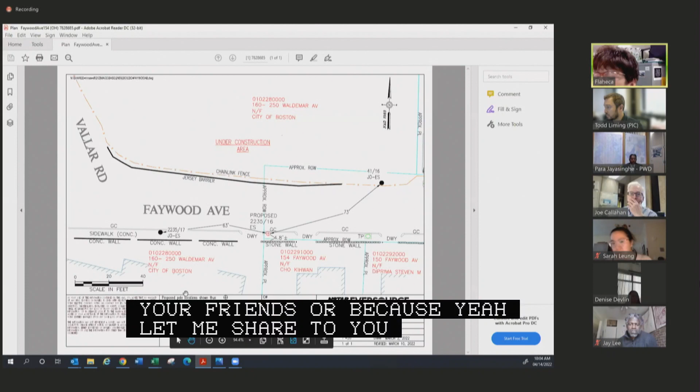Yeah, let me share. So there's the location there of the proposed pole. And the engineer that designed the job said that they needed that distance to avoid slack from across the street from the existing pole. That's why they needed to put that in.

Thank you. Any comments by fellow commission members to the petitioner? Hearing none, Todd, did you all get a chance to look at this proposal? Are there any comments by PIC staff? Yes, we've looked at it, we're all set. Thank you, Todd.

Are there any comments by members of today's audience? I see none, though I will take this opportunity to remind members of the audience if they wish to add testimony, they should please use the raise hand feature at the bottom of their screen.

Thank you, Mr. Liming. Hearing no further comments, I'd like to hear a motion regarding utility pole hearing number 1. I'll make a motion to approve a petition by Eversource Energy for a pole installation within Faywood Ave as read into the record by the chair.

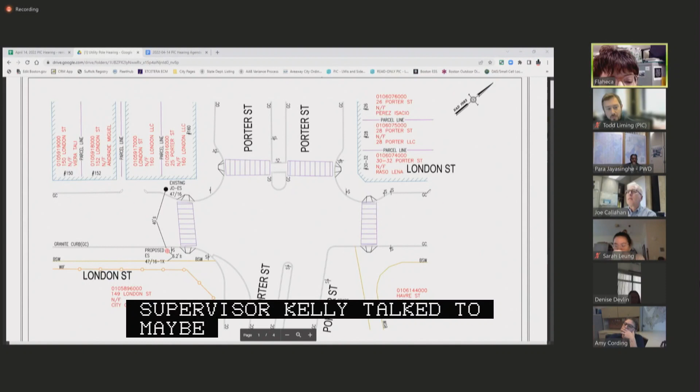So the sign on your plan that is right behind the pole is a stop sign. Yeah, I think my supervisor Kelly talked to maybe, I don't know who, but she did tell me that the plan is that when we install the pole, we'll move the stop sign to in front of the pole.

Okay, well, so I think that if you're moving the stop sign to in front of the pole, where we put the stop sign is somewhat important. So I think it's more that where the pole slides, the stop sign can still be where we'd like a car to stop, right? They can maybe switch positions, but I think we can't just keep sliding a stop sign down the road. That's probably what she meant, Amy.

I might have said it wrong. Also, why aren't we putting this in the gravel at the back of the sidewalk with the large highway signs? Why does this have to be in the sidewalk at an intersection? I don't have the answer for that. I can bring back your question and let you know.

Yeah, I mean, it shows it's owned by the City of Boston. It clearly has a bunch of highway signage, and there's a bunch of dead space in front of that fence line right there. I think that'd be a better spot for the pole. I can find out that answer.

Any additional comments by PIC staff? Hearing none, I'm of the opinion that you should field review this with or without the participation of PIC staff and address Ms. Cording's comments.

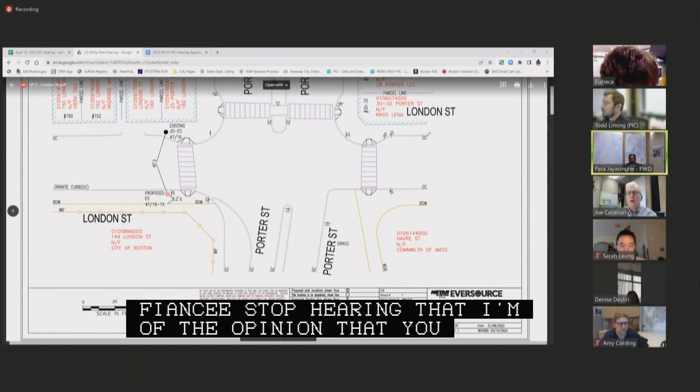Also, something that has been asked of all petitioners is to submit a recent photograph of this location. Oh, you have done that, my bad, sorry. Okay, so there you go. So I think Ms. Cording's comments are spot on as always, so your plans need to be reflected accordingly.

Understood. Because putting poles within the concrete path of travel is highly undesirable. We are trying to keep the sidewalk clear so that when I'm in a wheelchair, I can actually get to that crosswalk. Okay, so please amend your plans, resubmit them to the city's review, and that would require us to continue this hearing. Todd, is that correct?

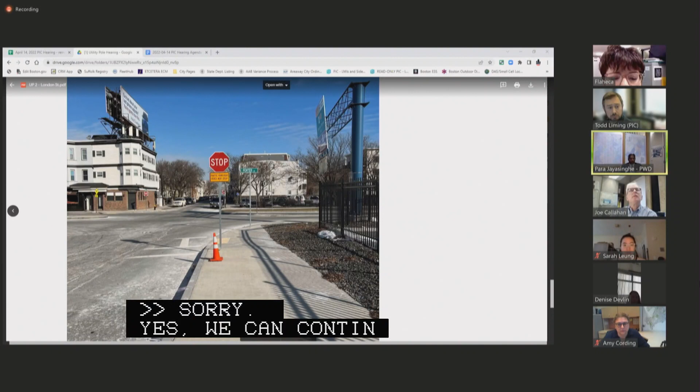Sorry, Mr. Liming, sorry, yes, we can continue this. So we'll continue it for 2 weeks, assuming that you can get your ducks in a row and submit an appropriate set of plans. Is that okay with you? Sure, understood. Wonderful. I'd like to hear a motion to continue the second utility pole hearing for 2 weeks. That should take us through April 28th.

I'll make a motion to continue utility pole hearing number 2 for 2 weeks until April 28th. April 28th, my bad. Second. All in favor? Aye. Aye. Anyone opposed or abstain? Hearing none, motion passes. Thank you.

Moving on to the public hearings continued portion of our agenda. Public hearing continued, item number 1, on a joint petition by the City of Boston's Mayor's Office of Housing and the Boston Redevelopment Authority, doing business as BPDA, for the widening, relocation, and extension of the existing right-of-way lines of Harold Street, a public way in Roxbury, from Holworthy Street to Hollander Street.

This was brought under new business on March 3rd of this year. First public hearing was March 17th, continued to March 31st, as shown on a set of plans entitled City of Boston, Public Works Department, Engineering Division, Widening and Relocation and Extension Plan, Harold Street, Public Way, Roxbury, 5 sheets dated March 31st, 2022. Good morning.

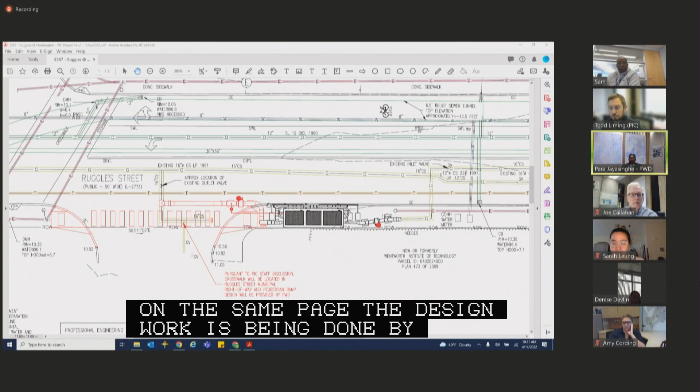Thank you, Todd. Just so that we are all on the same page, the design work is being done by the City of Boston. Set plans will be given to National Grid for their execution as part of this project. And the current PIC plans are adequate in its reflection of what is to be done. And the work will be inspected by respective parties to ensure the compliance of the ramps being built to the city standards. Something like that? Precisely. Thank you, yes sir. Correct. Any further comments by?

Apologies, commission members. I thought that we were doing the station first and then the sidewalk, so apologies for that misstep on my part. Peter, I'm sorry, Todd, did you hear what Mr. Nagel said? Yeah, we're all set. We are all set, good stuff, don't need to rework the issue.

All right, so at this point, I'd like to hear a motion regarding public hearing continued item number 4. I'll make a motion to approve a petition by National Grid for the making of specific repairs in Ruggles Street as read into the record by the chair, contingent upon the final design from Public Works on the ramp crossings.

Second. All in favor? Aye. Aye. Anyone opposed or abstain? Hearing none, motion passes.

Public hearing continued, item number 5. On a petition by National Grid for a grant of location to install a gas regulator station and associated infrastructure within Ruggles Street, a public way, Roxbury, located southeast of Huntington Avenue.

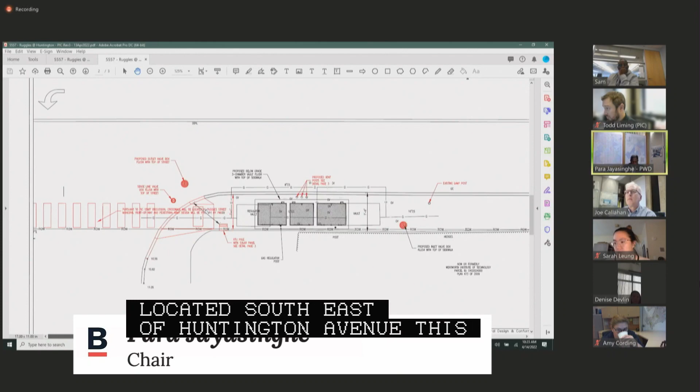This was brought under new business on March 17th of this year. First public hearing was on March 31st. As shown on a set of plans entitled City of Boston Public Works Department Engineering Division Grant of Location Plans, Ruggles Street at Huntington Avenue, Gas Regulator Station, Boston, 3 sheets dated April 4th, 2022.

Good morning, Commission members. Peter Nagel from National Grid, joined by Sam Uifo, our regulator station engineer, as well as Steve Damiano from Power Engineering, who is National Grid's permitting consultant on this project. What you have before you today, Commission members, is the previously referenced station that we worked with PIC Commission staff and pertinent city officials to reach a design.

The existing layout of the station would be replaced in kind in the sidewalk with resultant 12 and 16-inch coated steel piping, as well as a replacement of the 2-vault system with a 3-vault system with the aforementioned vent poles on the sidewalk adjacent to Ruggles, as well as the pole mount SCADA box, which you can see is closer to the proposed crosswalk with ADA compliant ramps.

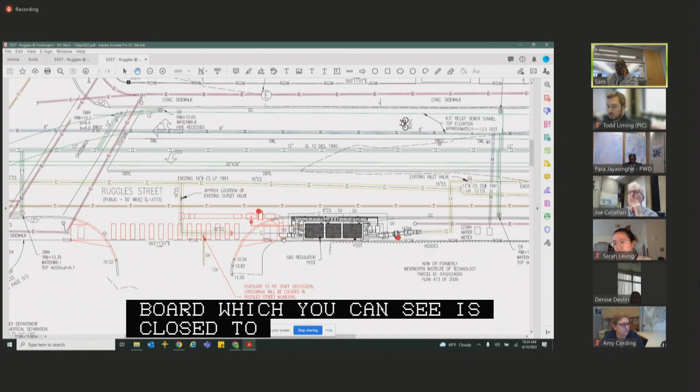Thank you, Peter. Going to ask a totally stupid question, obviously, everyone. I'm going to assume that the covers of your 3 vaults, the actual cover, is absolutely ADA compliant to today's standards.

Yes, as some of the commission members are aware, we've had a couple of meetings with the ADA, with Persons with Disabilities Commission, and instituted a pilot program that we have continued with those compliant and accepted Bilco doors, if you will.

Thank you, Peter. Appreciate that. And as always, work that is being approved by the Commission on matters of this nature, if and when the standards should change and evolve, you will do the necessary adjustments so that your assets are in compliance with our right-of-way needs. I'm going to assume that understanding is still current with you. Is that correct? Yes, it is. Thank you, sir.

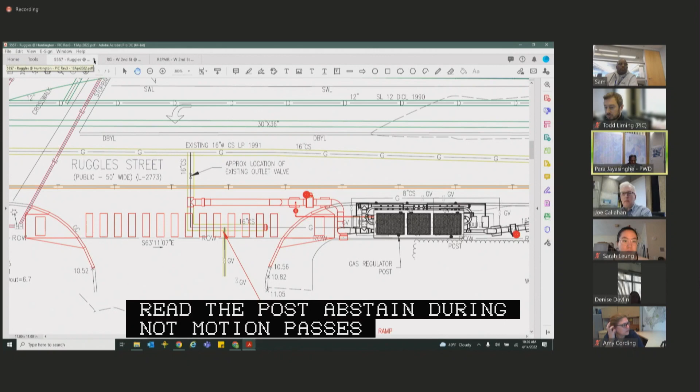Public hearing continued, item number 6, on a petition by National Grid for the making of specific repairs within the following public ways in South Boston, consisting of curb realignment, sidewalk reconstruction, as well as new and relocated pedestrian ramps and street lighting infrastructure. West 2nd Street, generally at West 3rd Street. West 3rd Street, generally at West 2nd Street. This was brought on as new business on March 17th of this year. First public hearing was on March 31st. As shown on a set of plans entitled City of Boston Public Works Department Engineering Division Specific Repairs Plan, West 2nd at West 3rd Street, Boston, 3 sheets dated April 6th of 2022.

Peter? Good morning, Commission members. Peter Nagel from National Grid, joined by Sam Uifo, our regulator station engineer, as well as Steve Damiano from Power Engineering, who is National Grid's permit consultant on this project.

National Grid has long heard the Commission's desire to get its infrastructure out of the public rights of way, ideally on adjacent properties. That was not possible here. So what the Commission has before you is a plan to do some robust streetscape and curb work to accommodate a new regulator station in that vicinity, which is presently in the existing roadway layout.

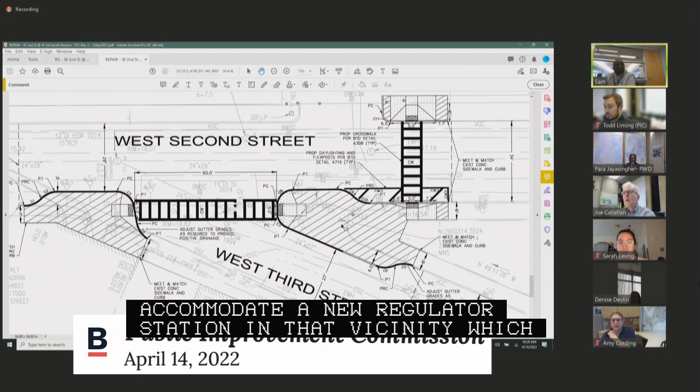So working from left to right on the screen with the plan in front of you, the cross-hatched areas are the new curb lines, which have been approved by pertinent city officials working diligently with PIC staff. That new deeper shaded line, the black line, represents about a 5 or 6 foot outcrop from the existing curb line on West 2nd Street as you approach West 3rd.

Moving to the right, you can see a new compliant ADA ramp, which will enter into a new crosswalk going across West 3rd Street. Similarly, on the right-hand side, you're coming into a new ADA compliant ramp. On that landing area, there is again a new curb layout, which again, in most areas is about 4 feet bumping out from the existing, which is shown again in the crosshatch. That area will be

the future proposed location of the regulator station as well. Above that crosshatch, you see again that curb bump in there on West 2nd, coming over to a compliant ramp which runs over to a new crosswalk crossing West 2nd, which will bring pedestrians across to another compliant ramp on that sidewalk on the other side of the street.

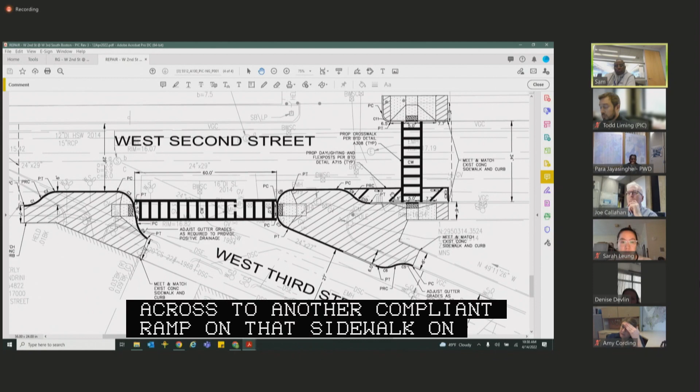Back to the West 3rd side, left of the existing crosswalk area, while the bump in is there above, on the dark crosshatch, will show where there'll be no parking areas to protect any pedestrians in that area, as well as to the right, again, a small no parking area where parking would start just beyond that on West 2nd.

Additionally, National Grid is proposing, with Public Works Department Street Lighting Division's support, 2 new light fixtures, one on West 2nd Street, which the commission members can see is indicated by the dancing arrow there, if you will, and then one on West 3rd Street as well.

Thank you, Peter. Any questions or comments by fellow commission staff? Yes, I think first the streetlights should be on the plan, the new ones. The streetlight is here. Okay, we're going to show it on the detailed design.

Can you hear? Sam, speak up. So we're going to show it on the detailed design. We're thinking we're going to do the regulator station first before the specific repairs plan. So on the repairs plan here, you have these streetlights as requested by the lighting department. And then we're going to make a connection from here to the electric manhole cover here for the city. Same thing here, the light pole is over here with connection to the electric manhole cover here. We've already agreed that with the city, the lighting department.

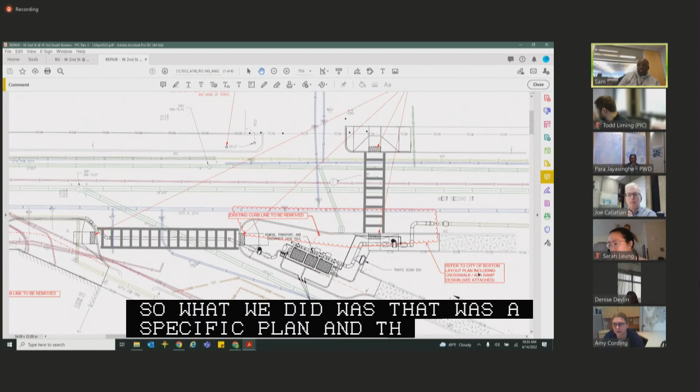So what we did was, when we got the drawings from the city at about 4:51 or so on Monday, I went to the specific repairs plan and put a cloud around it, and then added a note: refer to City of Boston's layout plan, including crosswalk/ADA ramp design, see attached.

So we referenced it in this drawing to let the city know there was a modification. And then we took the city's design that the city gave us and attached it to this PIC set to show that once we're done, National Grid will give the city exactly what is shown in this drawing here.

I think I get it. I think the issue I have with this design is that we're now creating a point where we won't be able to plow or sweep here, because we're putting this ramp behind a little bit of flex posts, right? So it's going to be a tricky spot. I think this isn't anything you're doing, like, we gave you something, but if we look at everybody's considerations here, I think that just stands to change.

I assure you it wouldn't be any different than the one that was on the previous plan, but I think it's really just whether or not putting flex posts at this location makes sense.

So one thing we can guarantee you, Amy, is that whatever final design or restoration plan the city has for this location, National Grid will provide the support.

And the light that used to be on this corner that you're taking away used to have the street name signs on it, like a hero square. It had a variety of things attached to it. If you move it and replace it with two different lights in two different locations, those signs need to find their way back to the corner. Sure.

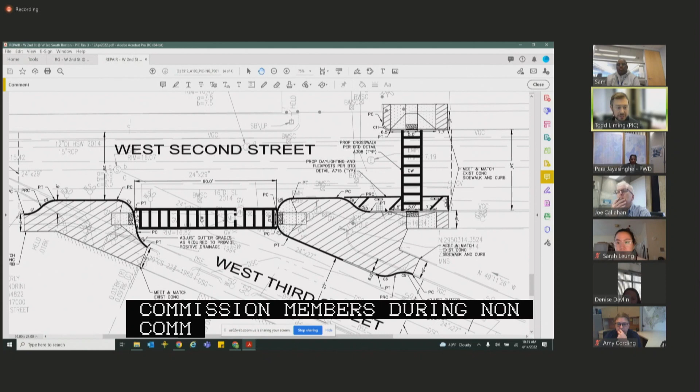No, we appreciate National Grid working with us to get to a design. So the final PIC plans will reflect exactly what everybody is looking for here, and I think we're pretty much there. Absolutely. Thank you, Mr. Liming.

Like to hear a motion regarding public hearing, continued item number 6. I'll make a motion to approve a petition by National Grid for the making of specific repairs within West 2nd Street and West 3rd Street, as read into the record by the chair, contingent upon the final design they received from Public Works. Second.

All in favor? Aye. Let's finish this one. Anyone opposed or abstained? Hearing none, motion passes.

Public hearing number 7, on a petition by National Grid for a grant of location to install a gas regulator station and associated infrastructure within the following public ways in South Boston: West 2nd Street, generally at West 3rd Street; West 3rd Street, generally at West 2nd Street. This was brought under new business on March 17th of this year. Public hearing, first one was on March 31st, as shown on a set of plans entitled City of Boston, Public Works Department, Engineering Division, grant of location plans, West 2nd at West 3rd, Boston, 3 sheets dated April 6th of 2022.

Peter? Good morning, Commission members. Peter Nagel from National Grid. I'm joined by Sam Oifo, our regulator station engineer, and Steve Damiano, who is our permitting consultant from Power Engineering.

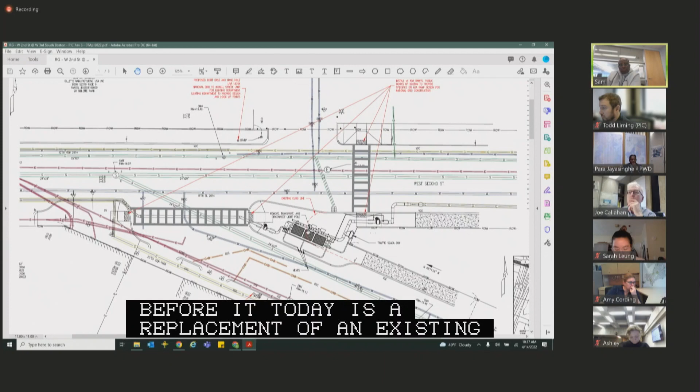The plan the Commission has before it today is a replacement of an existing 1960 regulator station that would be replaced with a 3-vault chamber. The existing station serves about 5,400 customers. And what we would like to do with Commission approval would be to place that vault within that newly configured area.

Sidewalk area, if you will, adjacent to the building at the corner of West 2nd and West 3rd. This construction would require about 80 feet of inlet piping and about 40 feet of outlet piping, both within that newly configured sidewalk area, as well as into the new roadway layout on the outlet piping.

Again, there would be 3 vent poles, which working with PIC staff, we have located at the sidewalk on West 3rd Street, which would be roughly 6 feet of passage on that newly created sidewalk area from the newly configured vault doors. Similarly, the skater box on this location would be proposed and has been requested to be placed adjacent to the building at the widest part of the newly configured sidewalk area there.

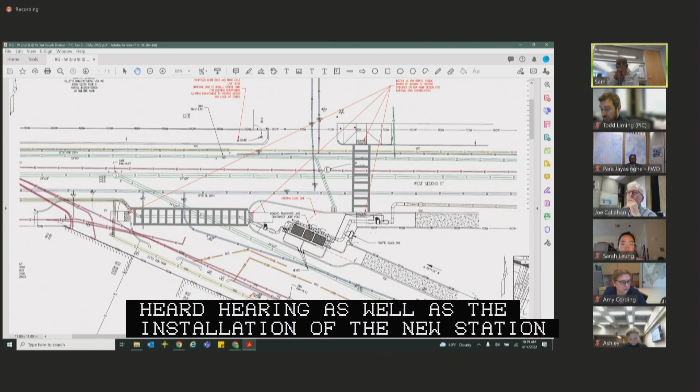I'll turn it over to Commission members if they have any questions. Any comments or questions by fellow Commission members? Hearing none, any comments by PIC staff and or members of today's audience?

Nope, all set. I'd like to hear a motion regarding public hearing, continued item number 7. I'll make a motion to approve a petition by National Grid for a grant of location in West 2nd Street and West 3rd Street as read and directed by the chair. Second. All in favor? Aye. Aye. Anyone opposed or abstain? Hearing none, motion passes.

That concludes the portion of our agenda that had continued public hearings. Now moving on to the public hearing segment of our agenda. The first 6 items, I believe, are from Verizon New England, Inc.

So I'll read the first petition, public hearing number 1, on a set of 3 petitions by Verizon New England, Inc. for a grant of location with lead company status and no participants to install new telecommunication conduits with city shadow within the following public ways in South Boston: Monsignor Dennis O'Callaghan Way, generally between Dr. Michael Galvin Way and Old Colony Ave; East 5th Street between K Street and L Street; K Street southeast of 5th Street; East 7th Street east of M Street; M Street between East 7th Street and East 8th Street. This was brought under new business on March 31st of this year, as shown on 3 sets of plans entitled: City of Boston Public Works Department Engineering Division Grant of Location Plan 37 Monsignor O'Callaghan Way, 2 sheets dated March 2022; City of Boston Public Works Department Engineering Division Grant of Location Plan 627 East 5th Street, 1 sheet dated March 2022; and City of Boston Public Works Department Engineering Division Grant of Location Plan 675 East 7th Street, 1 sheet dated March of 2022.

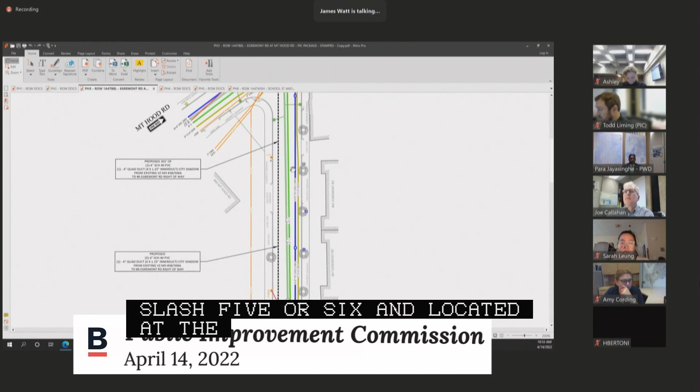All right, so for this petition request, Verizon is requesting to place 301 feet of conduit consisting of PVC and innerduct city shadow. The conduit will begin at Verizon manhole 38/506A, located at the intersection of Mount Hood Road and Egremont Road. The conduit will be placed down Egremont Road to the right of way at the private property line, number 6 Egremont Road, which the customer at 6 Egremont Road will continue the conduit placement to their location on their private property. The purpose of the work is to provide new services to number 6 Egremont Road.

Thank you, James. Any questions or points of clarification for Mr. Watt by members of PIC, fellow commission members? Hearing none, comments or concerns by PIC staff and or members of today's audience? No, none. Wonderful, I'd like to hear a motion regarding approval of public hearing number 3. I'll make a motion to approve a petition by Verizon New England for a grant of location in Egremont Road and Mount Hood Road as read into the record by the chair. Second. All in favor? Aye. One opposed or abstain? Hearing none, motion passes.

Public hearing number 4 on a set of 9 petitions by Verizon New England Inc. for a grant of location with lead company status and no participants to install new telecommunication conduit with city shadow within the following public ways in Dorchester.

Locations include Edwin Street between Dorchester Ave and Florida Street, Dorchester Ave and Edwin Street, Bay Street and Maryland Street, Maryland Street between Bay Street and Savin Hill Ave, Savin Hill Ave at Maryland Street, Hamilton Street southeast of Columbia Road, Columbia Road between Hamilton Street and Quincy Street, Moreland Street west of Brook Avenue between Moreland Street and Winthrop Street, and Pond Street generally between Columbia Road and Pleasant Street.

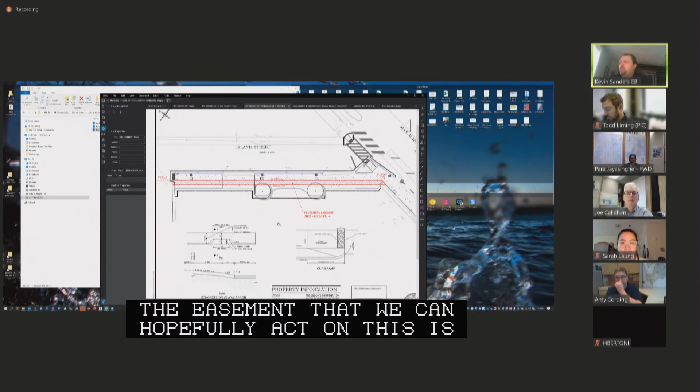Okay, Kevin, if you want us to entertain this item, you need to introduce yourself for the record, if that is okay with you. Yeah, this is Kevin Sanders, EBI Consulting, and I can show you the easement that we can hopefully act on. Let's see here. So this is the pedestrian easement, which is the area on our property, which we're going to be having the concrete sidewalk on Island Street. It's about 829 square feet and approximately 4.5 feet wide, roughly, on Island Street.

Thank you, Kevin. Any questions for Mr. Sanders by fellow commission members? Hearing none. Any comments by PIC staff or members of today's audience? No, none. I'll say none on this one. I'd like to get a motion regarding public hearing number 7.

I'll make a motion to approve a petition by Atlantic Oliver Mass LLC for the acceptance of a pedestrian easement adjacent to Island Street as read into the record by the chair. Second. All in favor? Aye. Anyone opposed or abstain? Hearing none, motion passes. Public hearing number 8.

On a petition by Atlantic Oliver Mass LLC for the making of specific repairs within the following public ways in Roxbury, consisting of curb realignment, sidewalk reconstruction, as well as new and relocated pedestrian ramps, street lighting infrastructure, and driveway curb cuts. Massachusetts Ave on its southwesterly side at address number 909, southeast of Island Street, west of Massachusetts Ave. This was brought under new business on March 31st of this year, as shown on a plan entitled City of Boston Public Works Department Engineering Division Specific Repair Plan 909 Massachusetts Ave at Island Street, Boston, Roxbury, one sheet dated January 17, 2022, further revised on February 17 of 2022.

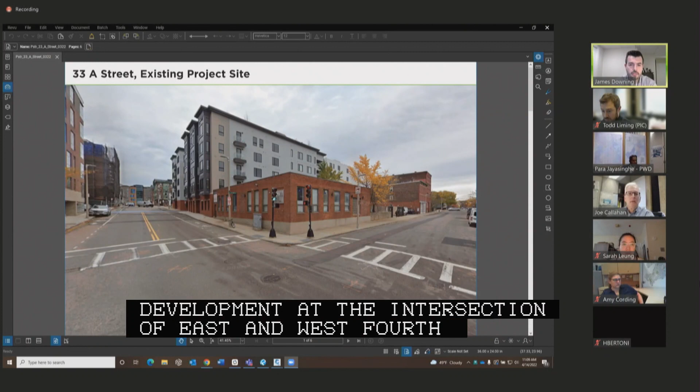During the BPDA process, there was a request to widen the sidewalks along A Street. The applicant is willing to do so by granting the pedestrian easement. The pedestrian easement along A Street extends for approximately 64 feet with variable width. There's also a slight increase in the width of the sidewalk along West 4th Street, resulting in a granting of pedestrian easement as well for that area that extends approximately 127 feet along West 4th Street. The total pedestrian square footage is 221 square feet for the project. Happy to answer any questions the commission members or the public may have.

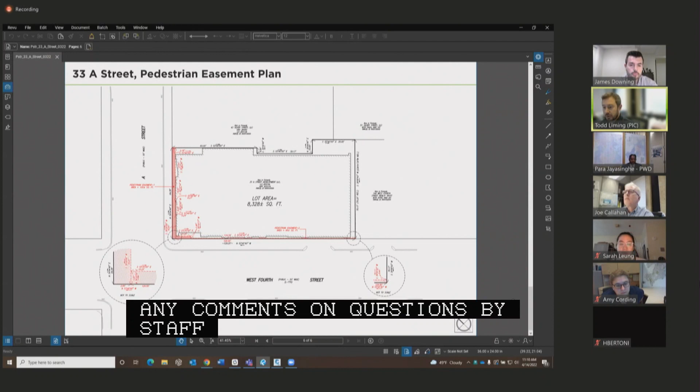Thank you, James. Are there any questions to Mr. Downing regarding the pedestrian easement part of this petition? Hearing none. Any comments or questions by PIC staff and or members of today's audience? No, none. Can we get a motion regarding public hearing number 9? Make a motion to approve a petition by 33 A Street Development LLC for the acceptance of pedestrian easements in A Street and West 4th Street as read into the record by the chair. Second. All in favor? Aye. Anyone opposed or abstain?

Hearing none, motion passes. Public hearing number 10 on a petition by 33A Street Development LLC for the making of specific repairs within the following public ways in South Boston, consisting of curb, sidewalk, and pedestrian ramp reconstruction, as well as new and relocated specialty pavement, street lighting infrastructure, traffic signal infrastructure, street trees, bike racks, and driveway curb cuts. A Street, generally at address number 33, northeast of West 4th Street, West 4th Street, southeast of A Street. This was brought under new business on March 31st of this year, as shown on a set of plans entitled City of Boston Public Works Department Engineering Division Specific Repairs Plan A Street and West 4th Street, 33 A Street, South Boston, 2 sheets dated February 21st, 2021.

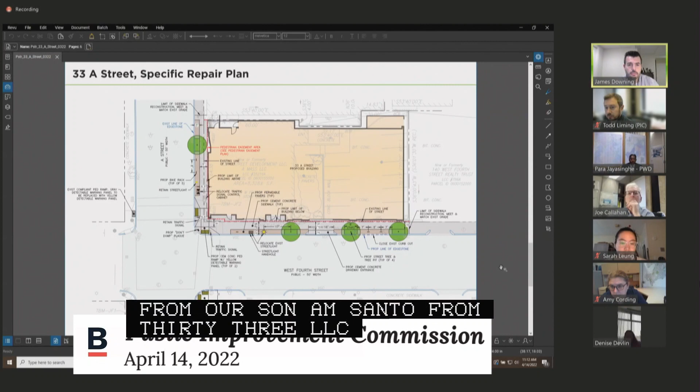Good morning, James. Good morning. James Downing again from Howard Stein Hudson, also joined by Maddy Blanchard from Howard Stein Hudson, and Mike Ingersano from 33 A Street Development LLC, who is the applicant. We are before the commission today to discuss the specific repair plan associated with the previously described project. Street improvements within the public way will include new concrete cement sidewalks, new street trees, new porous pavers within the furnishing zone, and new bike racks.

There will also be a reduction in the existing curb cut from 19 feet to 16 feet. When we were here two weeks ago at New Business, we received some comments from disabilities, which we've addressed and shared the updated documentation with them. We also received some new written comments from BPDA to look at the width of the sidewalk on A Street, which we were able to make wider. We got that resolved and submitted those revised plans to BPDA for sign off. But with that, happy to answer any other questions the commission members or public may have.

Thank you, Mr. Downing. Any questions for James? I know there were questions or concerns about the traffic signals and the location of the ramps. So any questions for Mr. Downing by fellow commission members? The only question I have is that you verified that we can slide this cabinet.

Right, so our construction group is dealing with that relocation. They submitted plans for that. There has been one round of review comments with BTD on that relocation. It did not come up as an issue. I can't guarantee right now if someone has actually gone out and opened the cabinet and gone through it with BTD whether it's an easy relocation, but it didn't seem to be a problem during the first round of comments. Right now, our construction group is getting ready to resubmit a revised set of plans for that. But I can work offline to be sure that is the case. If we can't relocate it, we'll be back with an adjusted specific repair plan.

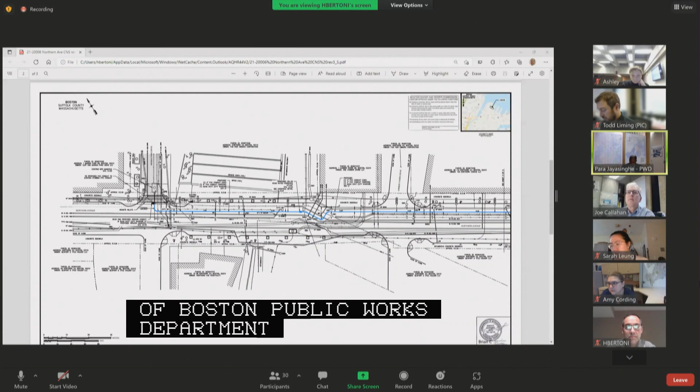Public hearing number 11 on a petition by Cambridge Network Solutions LLC for a grant of location with lead company status and one participant to install new telecommunication conduit with city shadow within Northern Avenue Public Way, South Boston, located between Marina Park Drive and Pier 4 Boulevard. This was brought under new business on March 31st of this year, as shown on a set of plans entitled City of Boston Public Works Department Engineering Division, grant of location plan Northern Avenue, Marina Park Drive to Pier 4 Boulevard, City of Boston, 3 sheets dated July 30th of 2021 and revised on April 6th of 2022.

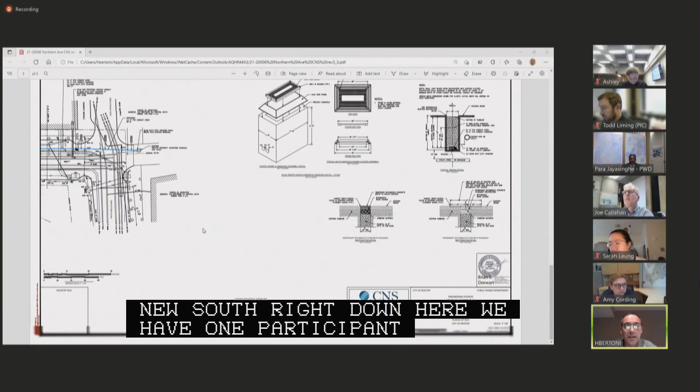Good morning. Can you hear me now? There you are, okay, I'm sorry. Good morning, members of the commission. This is Herb Bertoni, representing Cambridge Network Solutions. We are proposing to place approximately 675 feet of two 4-inch conduits with City Shadow conduit from Marina Park Drive in Northern Ave down to Pier 4 and Northern Ave. We have one participant in this trench, it's Verizon, and I am open for questions.

I'm so sorry if I missed this at the new business hearing, and I apologize for not having such a photographic memory. This segment of Northern Avenue, as you can imagine, has seen better days, worse days, and some days in between. The road surface has been resurfaced and reconstructed by the developers in this area. So my question is, is this segment of the roadway of Northern Avenue fairly new? Are you going to cut up a good-looking street, or is it a street that looks really bad and can survive another cut? It's not really new, no.

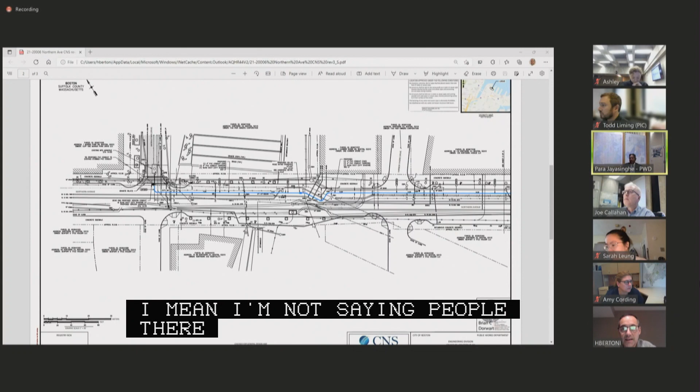Has it been cut? There are cuts out here, yes. So it looks chopped up left, right, and center. Yes. So your cut is not going to stand out as a lonesome cut. No, thank you, sir. Questions from my fellow commission members?

Hearing none. Hey Todd, do we know when someone is going to clean up Northern Avenue? This is a section where Eversource is doing their 115 kV line work, and WS is also performing a bunch of work associated with all of their developments. So this has been cut up for a while, and it will be cut up for a while, but eventually between WS and Eversource, we'll have a nice new surface out in this area. One of them will clean it up, right? Yes, this one will be holding the short end of the stick. Good, thank you, Mr. Liming.

Okay, so let me go through my questions. Any questions for my commission members? No. PIC staff, we are all good.

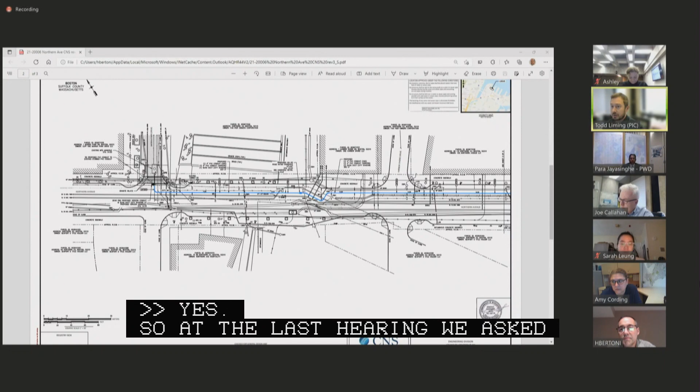At the last hearing, we asked that CNS coordinate with Eversource and WS to make sure they're not going to be in anybody's way. Also, it's worth noting that both CNS and Verizon were very cooperative in identifying this location as a good spot to join builds, so that we're not cutting twice and installing two separate sets of duct banks. Thank you, Todd. Again, my gratitude and compliments to all of you that work together to limit the amount of cuts, because we have a series of spaghetti network of utilities underneath these streets.

Thank you. If there are no further comments, I'd like to hear a motion regarding public hearing number 11. I'll make a motion to approve a petition by Cambridge Network Solutions LLC for a grant of location in Northern Ave, as read into record by the chair. Second. All in favor? Aye. Anyone opposed or abstain? Hearing none, motion passes.

Thank you, Herb. Okay, thank you. Have a good day. You too.

That concludes the public hearings portion of our agenda today. Now moving on to the new business portion of today's agenda. New business item number 1, 60 Guest Street, Brighton, specific repairs, earth retention license, sidewalk cafe license on a set of petitions by 60 Guest Street Owner LLC.

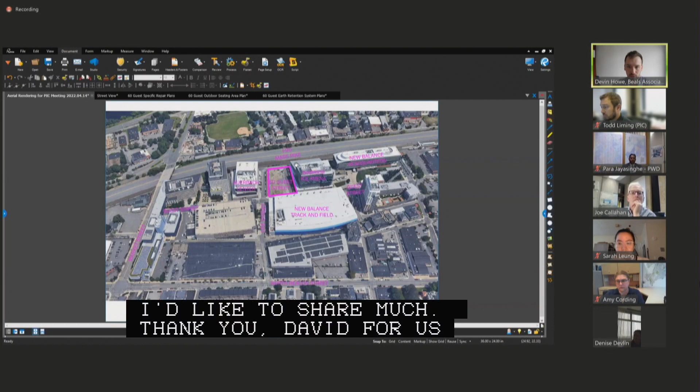Just to familiarize everyone with the project, here we have the Mass Pike on the top side. The project and property location is right here at 60 Guest Street. The Mass Pike is on the northerly side of the building. There's the Auerbach Center on the westerly side, the Warrior Ice Arena on the easterly side, and the New Balance track and field on the southerly side of the project. Guest Street generally goes in the east to west direction and sits right in here.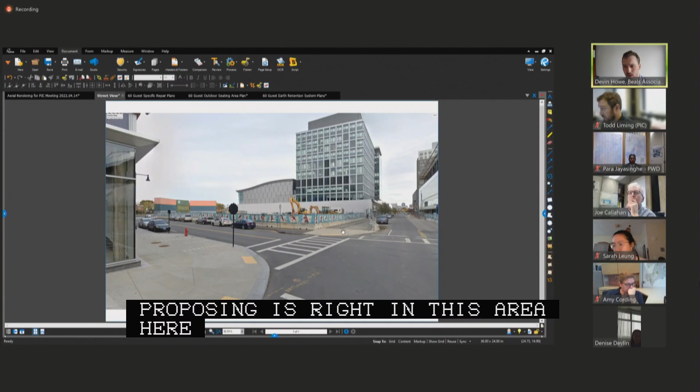Just to give everyone an idea of the existing conditions out there, this is a view of Guest Street from the westerly side of the project, looking easterly down Guest Street. The property sits right in here, in the center of the screen, where all those excavators are standing. Most of the work that we're proposing is in this area, and our specific repairs plan more or less is a change to what was originally approved as the master plan project. So really all the work to be done out there is more or less proposing changes to what was originally approved, not so much the existing conditions out there today.

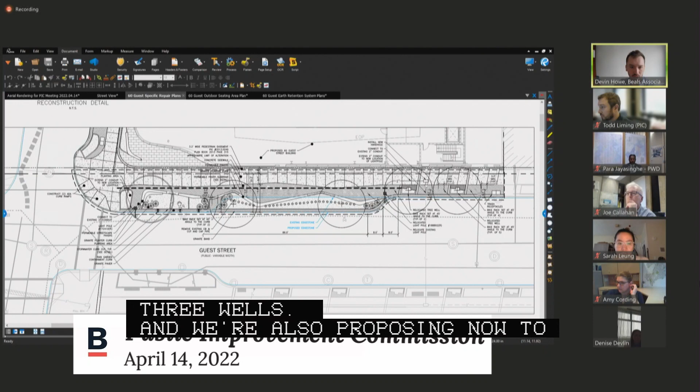We're also proposing to construct a total of 13 bike racks located throughout this area. There's 2 in this area here, and the remainder of the bike racks are really in this area, and then generally this area here.

As part of the installation of permeable pavers, which you can see through this pattern that extends from right here all the way down, we want to make sure any water that gets in that area drains out. So we're proposing to add a sub-drain underneath the permeable pavers.

I don't know if the chair would like to ask any questions on this before I move on to the sidewalk cafe plan.

Sorry Devin, I appreciate the little break to allow fellow commission members to discuss your specific repair plans. First question, if I may jump in: your sidewalk is not a consistent width because I believe your urban design gives a slight variation toward the sidewalk concrete segment width. Am I correct? Yes, that's correct, and it follows this red line right there.

Got it. And I'm going to assume that is agreeable to the commission member from the Commission for Persons with Disabilities. Sorry Sarah, is that okay with you?

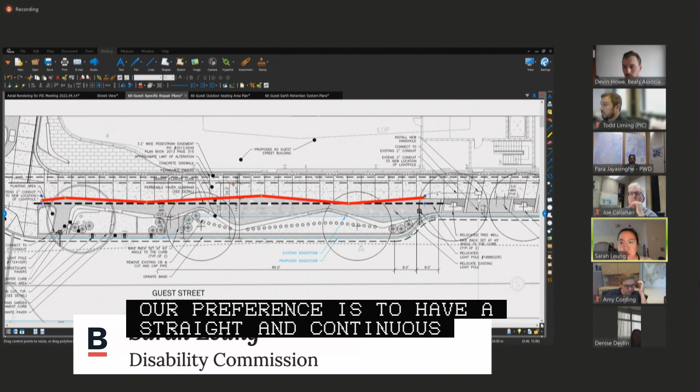I believe our preference is to have a straight, continuous, and consistent width across the sidewalk for the concrete path of travel. Can you clarify what the pinch point of that concrete path is?

Take a quick measurement. So the pinch point to the edge of the pedestrian easement is about 8 feet. Yes. Yeah, I think that does meet our preferred standard for a sidewalk in this area, so that is acceptable to us.

Sarah, if I understood you correctly, the minimum width is okay, but the little piano accordion - that's an old word - the varying width of the sidewalk is a concern, and your preference is just to get a straight line that mimics the back of the sidewalk, something like that?

Yes, it does meet our standards. However, the preferred design method would be to have a consistent width, if at all possible.

Okay, we can update our plan to have a constant width if that's the commission's preference.

Yeah Devin, this is that tricky point where from an urban design aesthetic viewpoint it may look a certain way, but then when you look at universal access, it tends to be a bit of a situation for those with sighted challenges or people who have difficulty differentiating color, texture, and things of that nature. So we continue to seek the guidance of Sarah and her team to help us on matters of this nature.

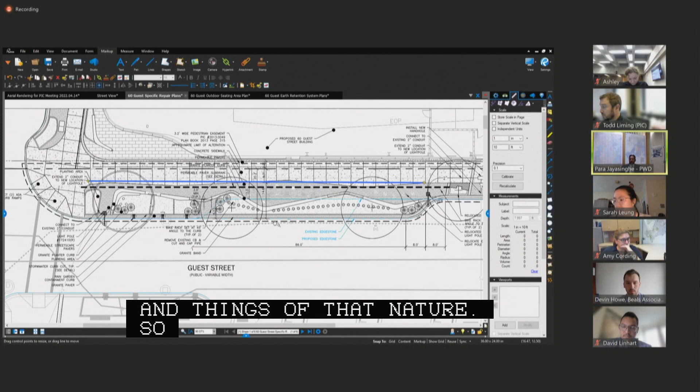Okay, we can alter that sidewalk to generally just follow a straight line, as I show in blue on the plan now.

Thank you. While maximizing the width, bring that line down as much as you can. No, okay, negate my comments - it's your decision in consultation with Sarah.

Any further questions on this aspect of the petition for Devin from commission members? If not, Devin, you can move to the... either one of the licenses. Sure.

So this is the outdoor seating area plan. What we're proposing is a box right here, about 700 square feet.

As part of what we're doing inside the building, we're looking at potentially having some sort of small deli sandwich-like place within the building that would serve very basic food. It's not intended to be a restaurant user inside the building. However, people that get food inside the building will be able to come out here and enjoy their food during a lunch break or something of that sort.

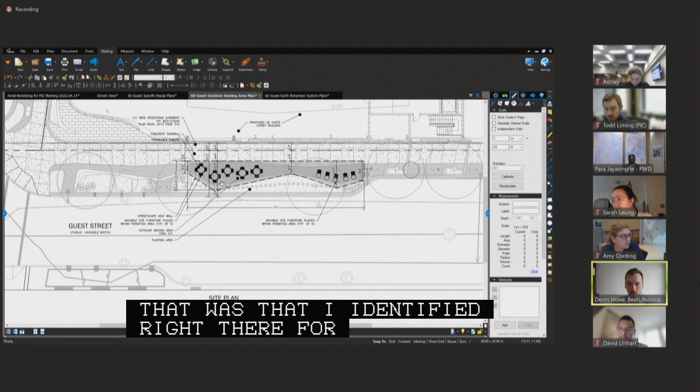What we're also proposing is just some various movable furniture located within this seating area. There would be a streetscape seat wall that follows the southerly side, demarcating the limit of that outdoor seating area, and extends generally through this area here.

And then I did receive a comment yesterday from PIC staff regarding adding a barrier along this northerly edge to demarcate the limit of the outdoor seating area. I did have some discussions with Sarah regarding keeping this open to the public and not having a barrier, but understanding it's PIC's preference to have a barrier within this area, we're going to look at using some stanchions with a chain to demarcate the limit of the seating area on the northern side. Happy to answer any questions the commission may have on this petition.

If you are headed in the direction of stanchions, please make sure there is a cane detectable edge along the stanchion. So if you're using chains, just having a double chain closer to the bottom so that edge is cane detectable is preferred by our commission.

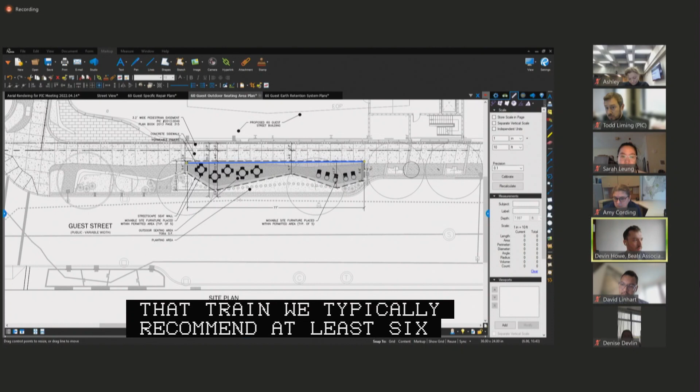I think to the tune of the previous comment about whether or not this irregular kind of line, it would be nice if the cafe was contained within the paving area, right? So if you've got 8 feet, rather than the cafe riding and having these slivers of concrete as part of the cafe, it would read very clear what's sidewalk and what's cafe if the line followed that. I agree, I think that's a great point.

As I was discussing the plan, I think your idea is if we continue that concrete edge, the limit of the cafe area would be right there, just so it's easy to understand what's the cafe versus what's the actual walkway itself. So we can definitely make sure we update that on the plan.

Devin, can you also clarify quickly the vertical devices that are there to cordon off the cafe, or is it just open? Because we do have sidewalk cafe furniture enclosure guidelines.

Amy, can you take it from me if there's an awful noise coming from me and I need to mute this otherwise?

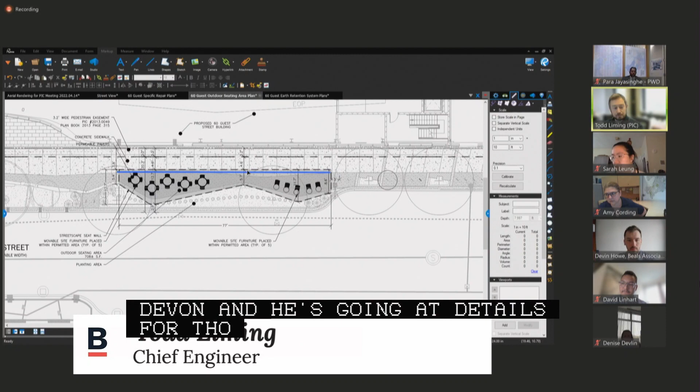Regarding the sidewalk cafe guidelines, yeah, we've discussed this with Devin, and he's going to add details for those barriers to his plans, and we'll make sure they conform to our standards. Thank you, Devin, you can continue.

Would you like me to go to our earth retention petition? Please. Okay.

So this is again along the frontage of the building, along Guest Street. What we're proposing is, in assistance of construction, to install sheet piles within the public right-of-way, generally following along my cursor here. The sheet piles would include tiebacks that would extend into Guest Street, as I'm showing in blue right now, and they'd extend more or less along the entire frontage of the proposed project.

After construction is complete, we're proposing to cut off the sheet piles a minimum of 6 feet below finished grade in the areas outside of our property line. Also, the tiebacks themselves would be detensioned after construction. The tiebacks are approximately 35 feet long.

Other than that, happy to answer any questions the commission may have. Thank you, Devin. Today there was a scheduling conflict with the representative from the Inspection Services Department. He's not able to be at this hearing, so I'm going to do my best to cover maybe a portion of what his concerns might be.

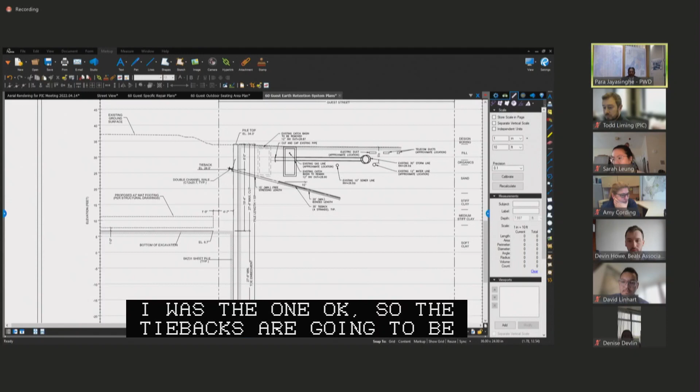That's the one, okay. So the tiebacks are going to be, so I'm going to assume you have contacted all the utility companies and they are aware of the work you are doing when you are going to be digging and any type of backfill or stability restoration of the utilities. Your team has taken care of that type of work?

Yes, we contacted all the utilities dating back to November of last year when we were going through before we made some minor changes to the plan. We've heard back from, I'd say, a majority of them. The only close conflict identified was an existing catch basin shown on this plan that we're actually proposing to remove as part of the specific repairs plan.

Yeah Devin, I'm also concerned about any gas lines. I don't know the age of the gas line, or the size of the gas line. All it says is there's an existing gas line, approximate location, and older gas lines are always vulnerable for, as well as I do, vibration, settlement, and everything else in between.

I don't know who has not responded to your inquiries, but please make sure that the critical infrastructure asset owners have responded and are knowledgeable about this. Actually, looking through my notes, Eversource Gas responded and said they have no comments or concerns with the proposal.

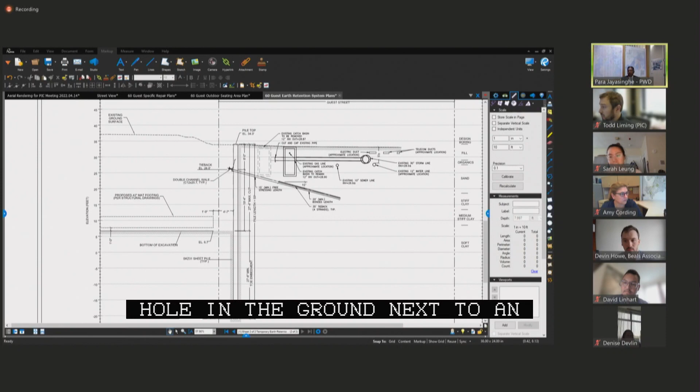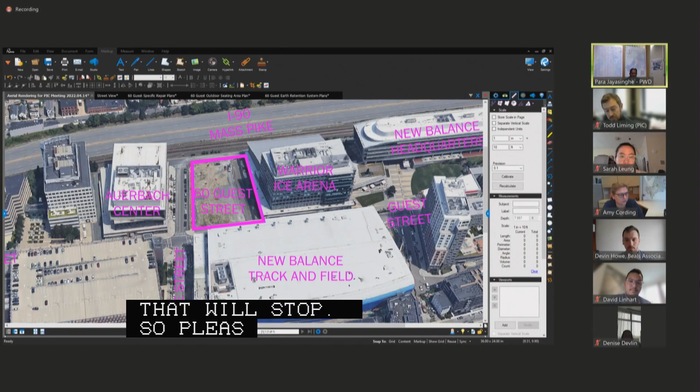Next point, you are digging a hole in the ground next to an existing building that is under use. Does that building belong to your portfolio, or is it a third party? Are you speaking of the Warrior Ice Arena building? Yeah, the big nice one over there. We're working closely with New Balance to ensure there's no conflicts with the Warrior Ice Arena. So in a polite, gentle way, we need assurances that you are in touch with them, that they have reviewed your plans, so that digging this big hole and the means and methods of construction will not undermine or undersettle anything. Please provide the necessary documentation that PIC staff may ask for to support approval of this petition.

Any additional comments by fellow commission members to the three petitions Mr. Howe presented to us? Hearing none, any comments by PIC staff and members of today's audience? No, we're all set.

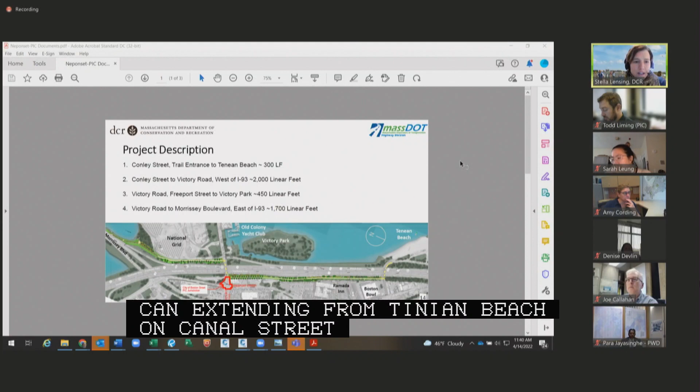Here's an overview of our proposed trail extending from Tenean Beach on Conley Street, heading northwards between abutters and the west side of the I-93 embankment, connecting at Victory Road, which is in Boston's jurisdiction, then continuing northwards along National Grid to Morrissey Boulevard. Kellen will talk more about the specific area within the City of Boston jurisdiction.

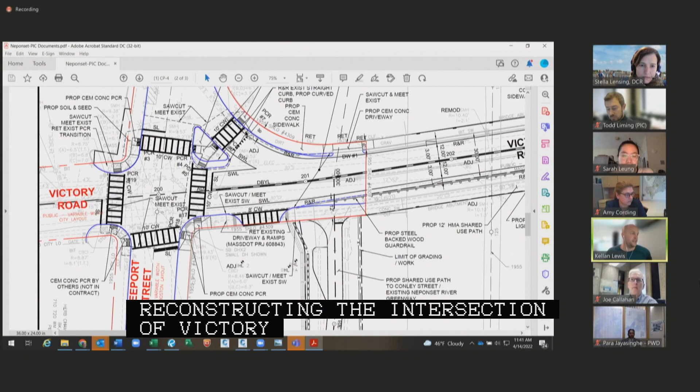Thank you, Stella. This is a quite long linear project, and the Boston PIC jurisdiction encompasses the intersection of Freeport Street and Victory Road, shown more closely on the specific repair plan. From where the MassDOT State Highway layout is reconstructing the intersection of Victory Road and Freeport Street to provide crosswalks, ADA accessible ramps, and connection from the City of Boston Street Network to this path, transitioning from the existing condition to the proposed condition from DCR and MassDOT.

MassDOT most recently reconstructed their maintenance depot on the southeast corner of the intersection, and reconstructed the driveway on Victory Road as well as their parking lot. There isn't a lot of flexibility in changing that based on the grades going back into the intersection, so we've done our best to match that and blend it with the remainder of the network. The plans include cement concrete sidewalks, full depth reconstruction for the portion of Victory Road, milling and overlaying the intersection, and new cement concrete curb ramps.

Thank you, Kellen. Sorry, not meaning to cut you short, but is that the extent of your presentation, Mr. Lewis? Yes, and additionally, one other thing to keep in mind is the adjustment of sewer and drain structures within the project limits as well.

Thank you, Kellen. Any comments by fellow commission members to either Ms. Lensing or Mr. Lewis?

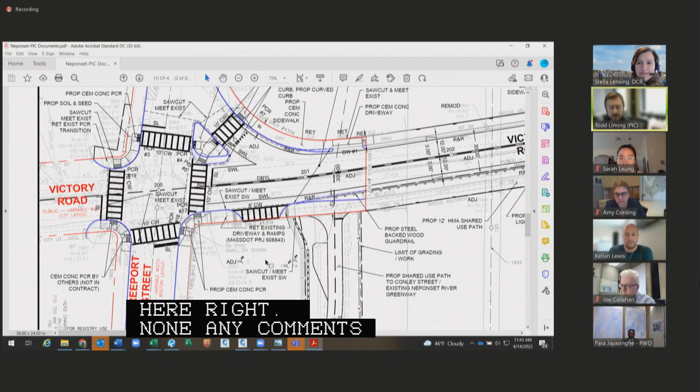Just one question, I'm noticing now the guardrail on the south side of Victory Road - who maintains that? DCR? Yes, it will be DCR, and we'll do the LMI with the city. Great, thanks.

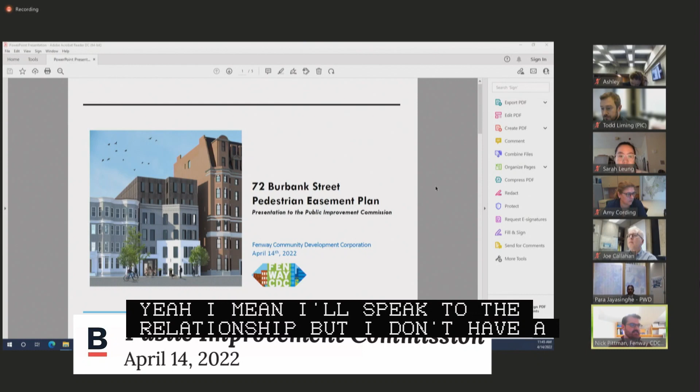It seems a little confusing to me. I'll let Nick speak to the relationship, but I don't have a problem with the representation here. I'm sorry if I wasn't clear. Fenway CDC is the project sponsor that owns these two LLCs in question. It will be a ground lease setup for the project where Burbank Terrace Acquisition LLC owns the parcel at 72 Burbank Street and leases it to Burbank Terrace LLC, which is the project borrower that will receive the mortgage, the state subsidies, et cetera. Got it, I got all of that, Nick. Awesome, okay great, sorry for any confusion.

So just a quick note of context. Burbank Terrace is this project that will be breaking ground in June at 72 Burbank Street in the Fenway. It'll bring 27 units, 100% affordable, to the Fenway. This is the rendering of the building as completed by Embark.

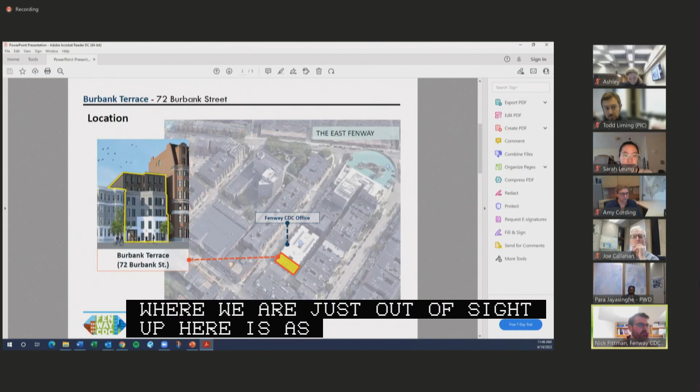Just some project context for where we are. Just out of sight up here is Mass Ave. Just over here is the Symphony. For folks familiar with the neighborhood, this is the big Whole Foods. This is Burbank Street right here with the parcel, which is currently an empty parking lot. Our CDC office is directly next door. So these are pictures of the site.

The pedestrian easement plan that we'll be discussing focuses on this area at the front of the parcel where the building will not extend to, but we will cede to the city as an easement for pedestrian access. Here is the zoomed out view of our pedestrian easement plan. You can see this is the empty parking lot here, this is our CDC office here, and this is Burbank Street running roughly west to east. And then I'll zoom into the relevant part of the easement, and Katie can run through it.

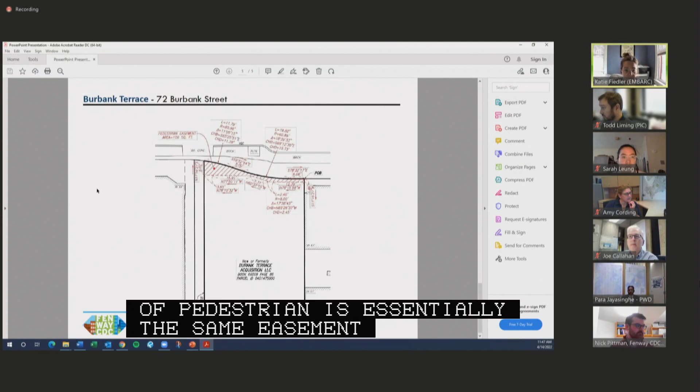Thanks, Nick, thank you everyone for your time. The zoomed in portion of this pedestrian easement plan is essentially just requesting the easement to provide an accessible concrete path in front of our building. The easement you're seeing is the approximate line of the edge of the building. We'll have a minimum pinch point of a 7-foot clear accessible path, which happens about here - if you can see my screen, that pinch point. The majority of the path will be an 8-foot concrete accessible sidewalk. That's about the gist of it, if there are any questions.

Thank you, Katie, thank you, Nick. Any questions or comments by fellow commission members to the petitioner? Hearing none. Any comments or concerns by PIC staff and or members of today's audience? No, none. Hearing none.

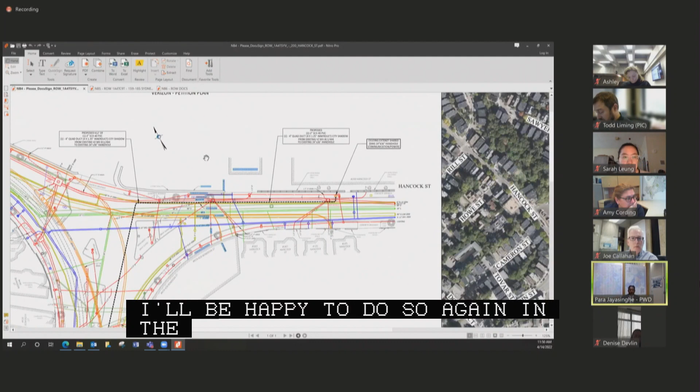Is there any questions for this? I'll be happy to field them. At the 60,000 foot view, we had some anomalies experienced on the public hearings 1 through 6. Are you of the opinion that some of this stuff needs to be further flushed out per the comments the city has given? The reason I'm asking is to get a sense of whether we should schedule your public hearing in 2 weeks or 4 weeks. That's the singularity of my question.

Yes, this is one of the ones we looked at, and there are a few anomalies. I think these next few Verizon actions should go to May 12th, in my opinion.

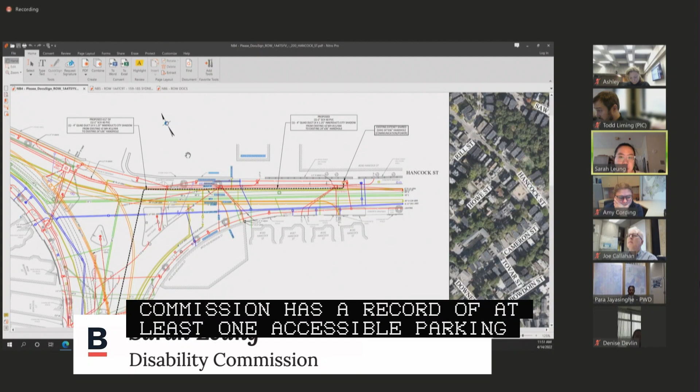Okay, so at least we know when we'll see you again. Are there any further comments or questions by fellow commission members? It does look like the Disability Commission has a record of at least one accessible parking space in this area along this project limit, so if you haven't already, please coordinate with my office if any relocation is required. Yeah, we'll do that, thanks Sarah.

Thank you, Sarah. Any further comments by fellow commission members, or PIC staff and/or members of today's audience? Hearing none, James, we will see you in 4 weeks for this item, new business number 4.

Number 5, 159 through 185 Sydney Street, Harbor View Street, Dorchester, grant of location on a petition by Verizon New England Inc. On this request, Verizon is seeking permission to place conduit from manhole 2188 at the intersection of Harbor View Street and Sydney Street. The intended conduit will be placed down Sydney Street to an existing ExteNet handhole in the concrete sidewalk near 179.

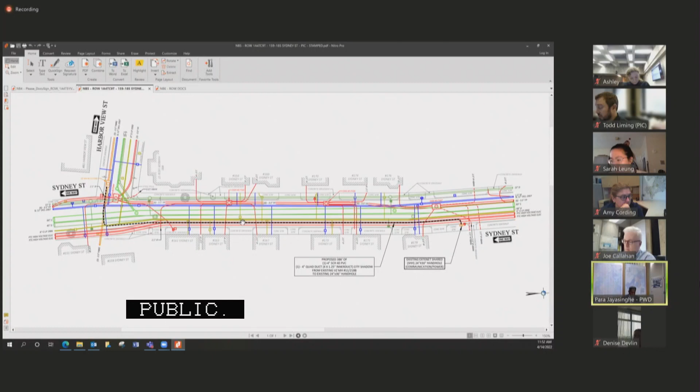Thank you, James. Any questions for Mr. Watt by fellow commission members, comments by PIC staff and/or members of today's audience? Same comments as before, nothing from the public. Thank you, Todd. James, we will see you in 4 weeks, marked up for a public hearing on May 12th.

Item number 6, 345 Old Colony Ave, Preble Street, Vinton Street, Columbia Road, South Boston, grant of location on a petition by Verizon New England Inc.

This request has two conduit placements grouped into one item. The first, the conduit will be placed from manhole 33-131 at the front of 77 Preble Street. The intended conduit will be placed to the intersection of Columbia Road, and it'll be placed down to the shared handhole at Vinton Street near 345 Old Colony Ave, to an existing ExteNet shared handhole.

Would you like me to move on to the second one, or do you have any questions? Go to the second one, James. The second conduit is also intending to place from manhole 33-131. The intended conduit will be placed to a rotary on Columbia Road, to an existing ExteNet shared handhole in the rotary. The purpose of this request is to provide new service to Preble Street.

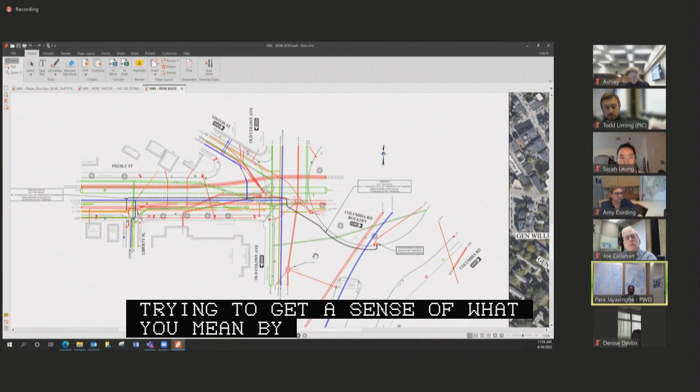Okay Todd, that rotary, the real estate within the rotary, to whom does that belong? Is it ours or DCR's? The rotary itself is DCR's, but Preble and Vinton are city streets.

Got it. Any questions for Mr. Watt by fellow commission members? Same as my previous comment, we do have a record of a space within the project area.

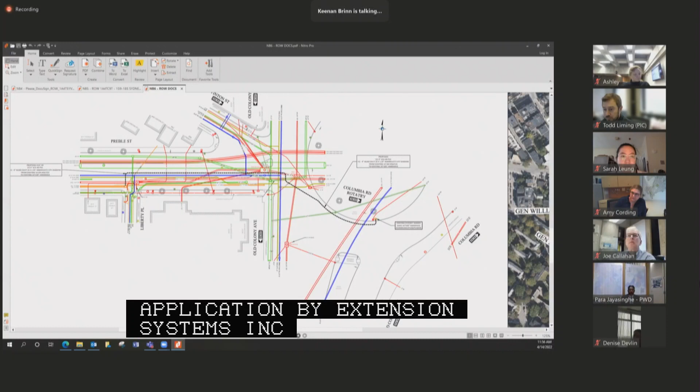Good morning, someone. Good morning. Hi Keenan, how are you? Good, how are you? Good morning, Commissioners. My name is Keenan Brinn. I'm here on behalf of ExteNet. I'm also joined by Han from NBNC Engineering, who is going to give some engineering support and answer any technical questions you may have.

Han, if you're there, you can go ahead and pull up that first petition. Can you guys see my screen? I can, yeah. There you go, thank you.

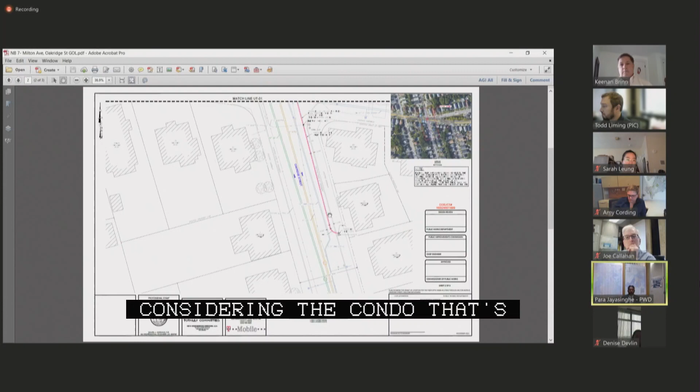We're only considering the conduit that's being installed on Oakridge and Milton Ave. So the limits of the right-of-way of Gallivan Boulevard need to be shown. Otherwise, someone else might come to the wrong conclusion as to what PIC is approving. Okay, so if you could scan up or down to where your match lines are, that shows the Gallivan Boulevard part. There you go, right there. So you need to differentiate the color coding system so that it is something different outside the city's right-of-way, which would be nothing along Gallivan Boulevard.

Okay, so that's one. Now Todd, as far as, because there cannot be this mythical transition point between the two, Mr. Brinn, have you gotten permission from the State Department of Conservation and Recreation or MassDOT to dig through their street? Yes, we're working through the approval process now with MassDOT. What does that mean? That means basically the two hearings need to have some sort of a semblance where MassDOT shouldn't feel pressured because PIC has voted on it, or the other way around, because the start and the end are on city property.

I want to understand where those levels of communications are in terms of surface restoration, work details, and all of that good stuff. I can certainly provide that level of detail if necessary for the next meeting. Just share it with PIC staff so that PIC staff can be in a position to guide us.

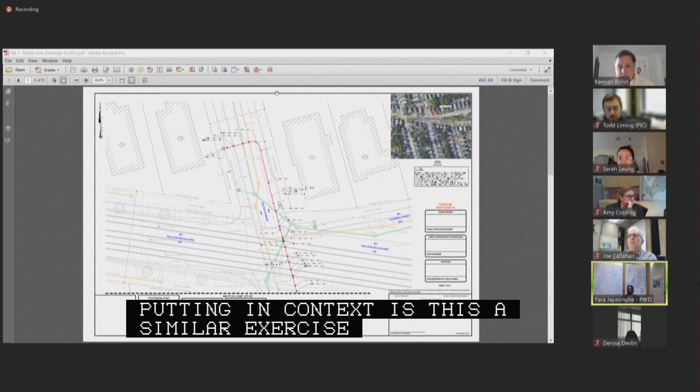Or did I lose you in my comment? This would be similar to what we've done in the past with the shadow ducts. No, sorry Keenan, this work - are you strategically putting conduits for anticipated future use, or is there an immediate client or service that you are trying to provide here?

Well, we would provide the shadow duct from pole to pole, and so on. XNet, we do all the same with 2 4-inch conduits for XNet to use and 1 for the city. So the 2 currently with spare capacity for XNet for their own use.

Todd, could you - hopefully you follow what I'm asking? Yeah, so I think the question is, do you need to make this connection now because there is a need for additional service in this area now, or are you simply installing this conduit because you think you might need it in the future, but you might not need it in the future? No, we definitely need the service. As a matter of fact, we prioritize these, Todd, to make sure that we have the ones that are most advantageous to us in front of you first, and we move on from there.

Yeah, this is not something that's planned for future use. Sorry Mr. Brinn, that's what I was asking. Okay, the echoes in this room are not the best, and I'll do my best to speak in a monotone voice to capture the essence of what I'm trying to say.

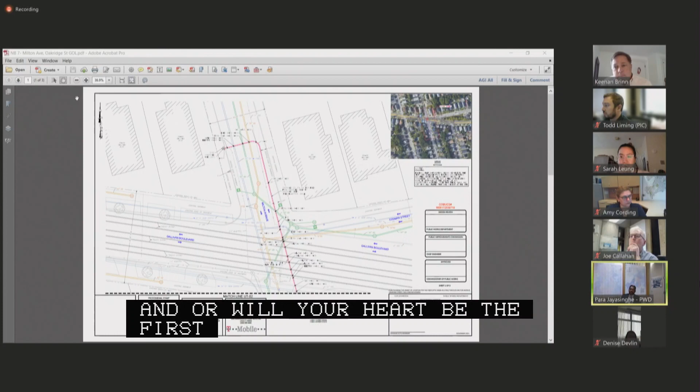My second question is the condition of Milton Avenue and Oakridge. Will your cut be the first cut on that street as it is today, or is it a street that has been cut multiple times? How does the street look? I've asked for photographs to support your petitions, and I am unable to see the photographs.

The best answer I can give you is whatever cuts... Todd, did we lose Mr. Brinn? Yeah, he may have frozen.

I do not know offhand if I am the first cut or if there are cuts after that, but I can have that information for you for the next meeting. Arthur, that will be so helpful if you can provide those photographs when you submit the paperwork to Mr. Liming for his evaluation to see whether you are eligible to be put on the agenda. That will be truly helpful, Arthur, if you can help us on that front.

No problem. And just a question going forward, Para - would you like to see photos for all of these streets prior, or at least have them available for the first meeting? Prior, okay. So Mr. Liming and his team can make an assessment as to the consequences of that first or the tenth cut. Got it.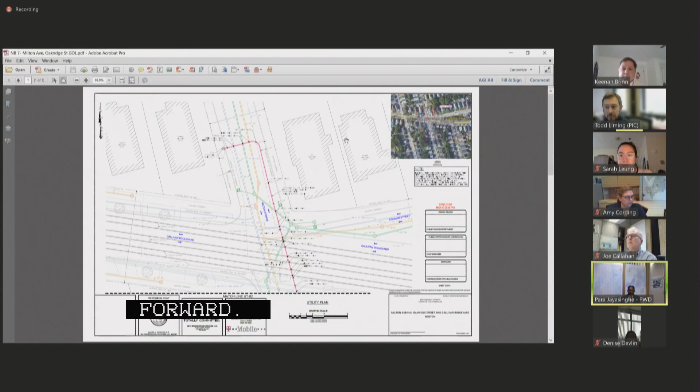Any comments or questions to Mr. Brinn, Mr. Pino, or Mr. Han by fellow commission members? Yes, similar to my previous comments, the Disabilities Commission does have a record of an accessible parking space along this stretch. So please coordinate with our office via email if any relocation of that spot is needed due to construction.

Thank you, Sarah. Yep, any other comments?

Hearing none, comments by PIC staff and or members of today's audience? No, all set. So Mr. Han, if you could adjust the drawings to reflect the portion of the work on Gallivan Boulevard as not within the purview of the commission, we'll appreciate that.

Excellent, we will see you in 2 weeks on April 28th. Is that okay with you, Mr. Brinn? That'd be fine, yes, thank you.

Awesome, thank you. Next item, hearing number 8, new business number 8: Hyde Park at Stella Road, West Roxbury, grant of location on a petition by ExteNet Systems, Inc.

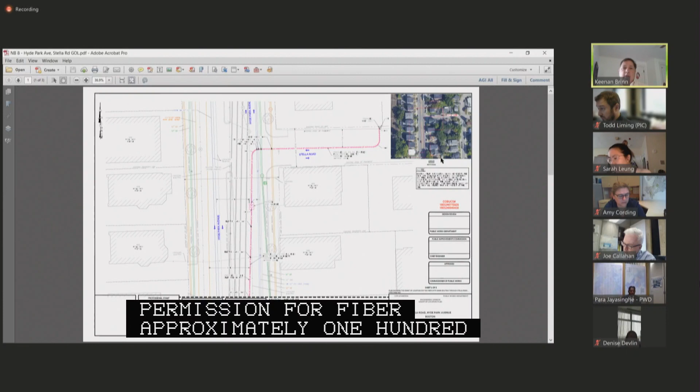We have another application in front of you seeking permission for a fiber duct approximately 409 linear feet. It would start on Stella Road at a pole, head west, then south down Hyde Park Avenue, all encased in conduit. We would supply a shadow duct for the length of it and terminate that for the city with a handhole or manhole adjacent to the ExteNet location.

We've reached out to the applicable city agencies and are making revisions for any suggestions that Todd may have. We should have those to you early next week, readily available for the next meeting in two weeks' time. Again, this is a 409-foot run. If there are any questions, we'd be happy to take those on from an engineering or construction standpoint.

Thank you, Keenan. Is this for immediate use or a strategic future use? Yes, these are being built for our use in the near future. This isn't something that would be constructed and then used at some future point. We have plans for these as we speak.

Thank you, Keenan. Any comments or questions from Mr. Brinn or fellow commission members? Hearing none, comments by PIC staff or members of today's audience, and I believe Mr. Kirkpatrick is here. Todd, I'll let you take it from here.

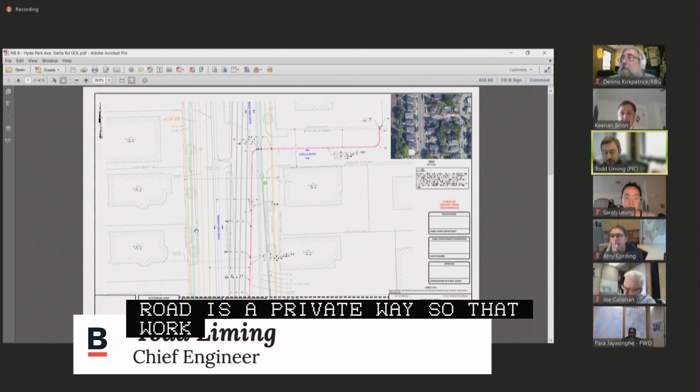Just worth noting, Stella Road is a private way, so that work will need to be coordinated with the owners of property abutting Stella Road. Also, it's my understanding, Keenan, correct me if I'm wrong, but this is servicing a new DAS node on Hyde Park Ave. Dennis Kirkpatrick, please feel free to add testimony if you like.

Thank you very much, Todd. You actually stole my thunder on Stella Road being a private way, but that's quite all right. I do want to reiterate from past meetings, I'll put my contact information in the chat room for ExteNet Systems. My particular interest is making sure local business owners are aware of the construction, give them a heads up on construction dates and extension, and make this as easy as possible on all parties so they can make arrangements for access for employees and patrons. There's a business cluster within 500 feet of Stella Road at the intersection of Cummins Highway and Hyde Park Avenue, and we're hopefully going to keep them informed. That was all I had.

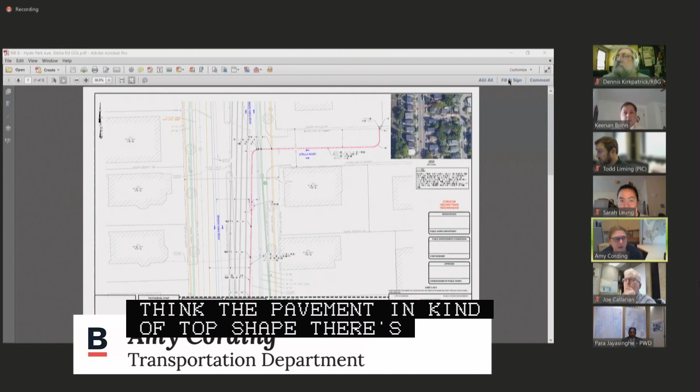Thank you, Dennis, for taking time to join us today with your thoughtful comments. I'll add that I know this is a private way, it's got nothing to do with us, but this trench is going to go right down the middle of the top of Stella Road. My last venture out there, the pavement's in kind of tough shape. There's no sidewalk out there, it's just pavement. So I think repaving Stella curb to curb would be a benefit to the residents and have this not be the final straw for the pavement that's out there.

It's Arthur Pino again. I will make my way out there within the next week, prior to the next meeting, and review, take some photos, measurements, and we can certainly look at this as a curb-to-curb rehab on the street. I know it's not a long distance, but the last time I was out there, there really wasn't much pavement to speak of, so your trench would be the only pavement, but without the curbs and everything, it should be a pretty easy patch. I'll head out there within the next week.

Todd, does the Public Improvement Commission have the right to authorize the installation of these conduits within a private street? No, that's why I said this needs to be coordinated with the residents out there. So to my point, we need the plans to reflect that the Public Improvement Commission is not authorizing that work. The title sheet cannot have Stella Road on it, since this commission doesn't have jurisdiction.

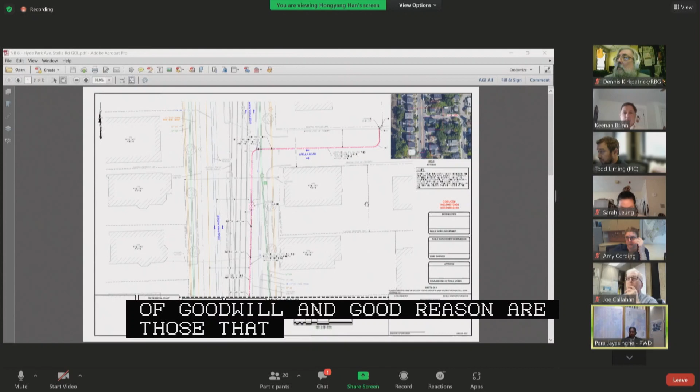Let's add a note to the plan calling it out as a private way. Dennis is right, we have another point to make - we want all commission members to understand the limits and responsibilities of this commission. It's the big P for public, not for private. So just on the plan start, the guidance Ms. Cording gave in terms of surface restoration on Stella Road is a matter of goodwill for those living on Stella Road, because I'm assuming the fee ownership of Stella Road belongs to the individual abutters on either side, to the middle of the street, if my memory serves correctly. That's the presumption. Thank you, so just adjust the plans accordingly.

I think Mr. Kirkpatrick wants to come back into the conversation.

In the interest of being expeditious, I'm in direct contact with a couple of residents on that street, and I also have direct information on the leadership of the local neighborhood association there - the Mount Hope Canterbury Neighborhood Association. I'll put their coordinators in touch with Todd, and Todd can then pass that along to Mr. Brinn and Mr. Pino. That'd be perfect. Thank you, Dennis, thank you so much - we should bring you onto the city team at this rate. But seriously, thank you, Dennis.

Truly appreciate your guidance. We should be able to mark you up for two weeks, April 28th - is that okay with you? Yes. Okay, I'll assume so. Of course, yes. Thank you, Tina. You're welcome.

Next item, new business number 9, Bowdoin Avenue, Dorchester, grant of location on a petition by National Grid.

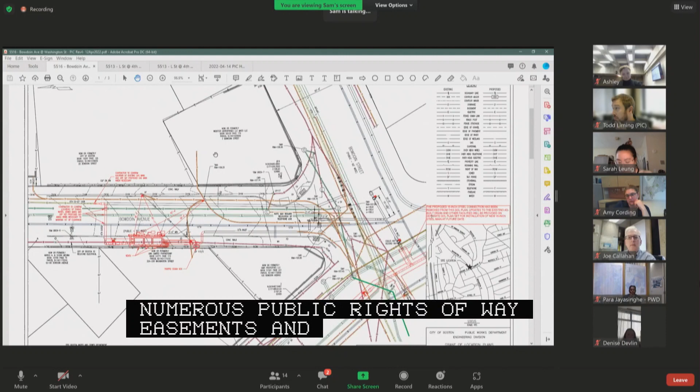Today National Grid has before the Commission a proposal to install a new regulator station on Bowdoin Avenue. This is the result of a long and circuitous path to the presentation before you today - we've sought numerous off public rights-of-way easements and access, and while some were promising at times, none came to fruition. So what you have before you today is a proposal to install a new station to accommodate fairly significant growth in that Four Corners area on Bowdoin Avenue. The existing location includes a 2-foot easement on that sidewalk area on the station itself, which will allow us to move both the station further into the sidewalk, and also remove any vent poles and get most of the traffic box out of the pedestrian access area.

This vault will serve roughly 5,000 customers or so. There's been significant growth at 330 and 335 Washington Street, Bowdoin at Harvard, Bowdoin Avenue at Bowdoin Street, and Bowdoin at Washington as well. So what we're looking to do is install roughly 200 feet of both 12-inch inlet and outlet, and 200 feet of 16-inch outlet piping, which will respectively tie into Washington Street and Bowdoin Street.

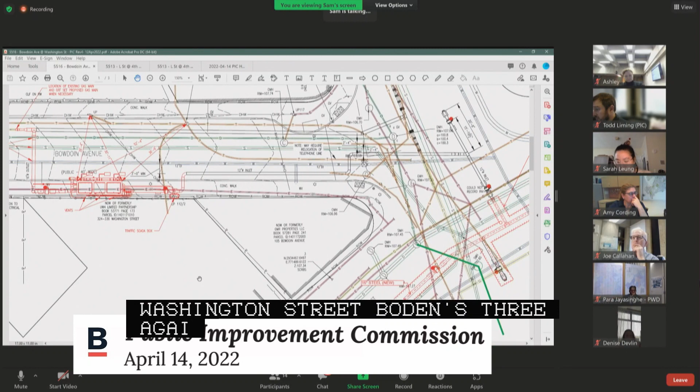Again, this location presented itself, but it's a little bit afield from the existing infrastructure we'll need to create for that station, serving about 5,000 customers. We were successful in securing an easement for some of the facilities on that sidewalk. Upon completion, what we've proposed is replacing the existing sidewalk on Bowdoin Avenue in that area of construction. I'll turn it over to commission members if they have any questions.

Peter, I appreciate the incremental or necessary sidewalk restoration you're going to do on Bowdoin Avenue, keeping in mind that you are tearing it up. But Peter, on the Bowdoin Washington intersection, that work is basically going to tear up that whole intersection now. What are your thoughts on how you're going to restore and put that street back? That's going to be one charming little cut, and it is neither charming nor little.

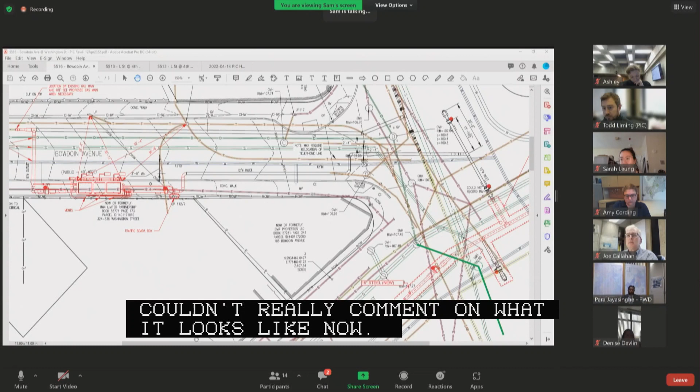I have to admit, Par, it's been a little bit of time since I've been out there, so I couldn't really comment on what it looks like now. I think what we'd probably look at would be - as I indicated, the pipe on the north side, or the top side if you will, is predominantly in that sidewalk. The other is coming into the streetscape more significantly. So relative to restoration, I'd have to take that as a takeaway, Par, and get back to you on that.

Peter, we truly appreciate why you need to do this work, but we are also trying to manage a city-owned asset called a street, where after the cuts, chops and restoration, it needs to look palatable with what the city is aspiring to do. So we truly appreciate if you or your team members can take an assessment of today's condition and suggest what sort of restoration work needs to be done with the eye towards owning that street. Put yourself in our shoes and see what needs to be done, because it's a common community which we are serving.

Okay? Correct. I'll go through the commission staff if that works for you. Absolutely. Please advise Mr. Liming, and he should be able to give you guidance as to whether the level of restoration you are proposing is conducive to the condition of the streets and the disruption that is going to be caused to those immediately abutting this neighborhood and area. So it'll be upon the advisement of Mr. Liming and his team. We'll do that. Thank you, sir.

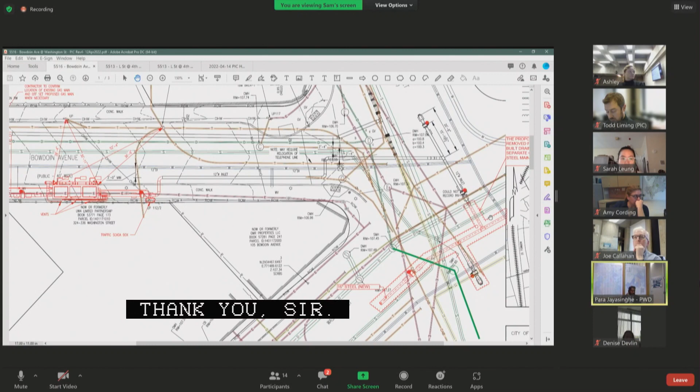Any questions for Mr. Nagel or his team by fellow commission members? Hearing none, comments by PIC staff and all members of today's audience? No, all set. Thank you, Todd. Again, few photographs can explain reality and the sort of restoration work that needs to be done. So we will mark you up for 2 weeks. That should be on April 28th. That'll suffice, sure. Thank you, Peter.

Thank you. Last item on the agenda, new business item number 10, L Street, East 4th Street, South Boston, specific repairs, grant of location on a petition by National Grid. Good afternoon, Commission members. Peter Nagel from National Grid, joined by Sam Oifo from National Grid and Steve Damiano, our permitting consultant from Power Engineering.

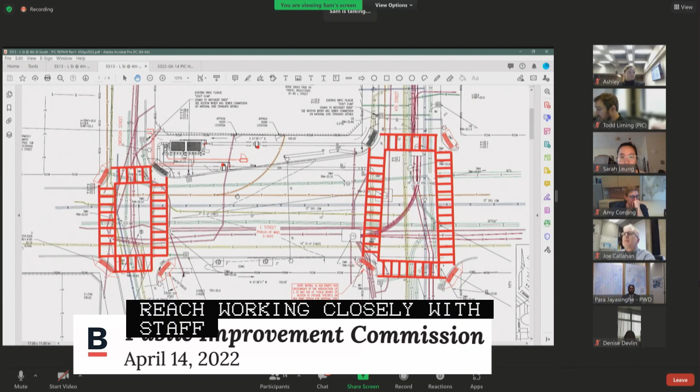Again, the Commission has before it a plan that took a little bit of time to reach, working closely with staff. Again, National Grid sought various easements in the neighborhood from abutter businesses and secular groups, none of which were ultimately successful despite numerous efforts on our part to get those easements. So what you have before you is a proposal to replace a late 1960s two-chamber vault in its exact location outside on the corner of L Street and Emerson Street.

The inlet piping would be replaced in the sidewalk's entirety, whereas the outlet piping would remain in the sidewalk area or that pavement or the concrete area into L Street, where it would tie in within that sidewalk area where the larger crosshatch is. National Grid is committed to working with the city on final design on replacing and/or creating ADA compliant ramps on those sidewalks referenced at the corner of L and East 4th, as well as the corner of L and Emerson.

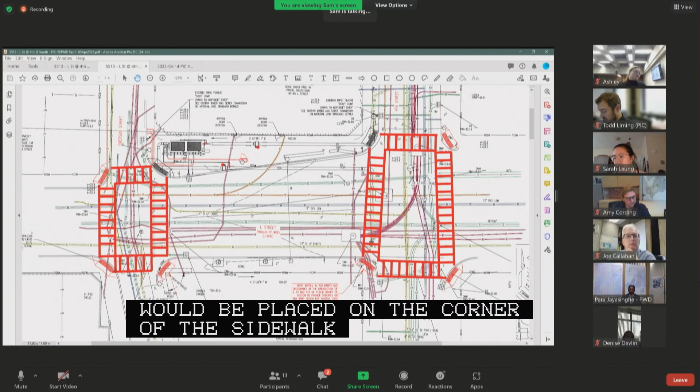The existing or the new vault, the new vent posts would be placed on the corner of the sidewalk on Emerson Street, whereas the vault, the traffic box would be on the corner of L Street. We've looked at a couple of things. Obviously, the access to that cleaners is going to be key, and there will be fairly lengthy discussions with the business owner prior to any work taking place, obviously.

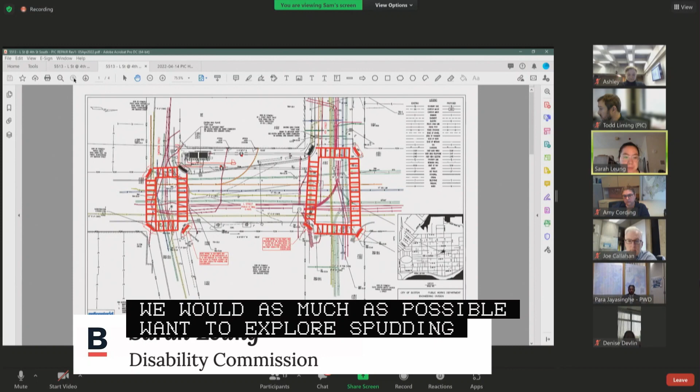Thank you, Peter. Thank you, Sam. Any questions for Mr. Nagel and his team by fellow commission members? The Disability Commission would like to work with the team further on some of the designs of these ramps. We understand that there are some site constraints out here, but we would, as much as possible, want to explore splitting these ramps into directional ramps, if at all possible. Alternatively, we could have raised crossings across these side streets.

Absolutely. Thank you, Sarah. Thank you, Amy. Any further comments by fellow commission members to the petitioner? Hearing none, comments by PIC staff and all members of today's audience. Now we'll coordinate with National Grid, Public Works, BTD, and Disabilities Commission for the design of these corners. Todd, is 2 weeks enough for this one? It's a good question. I'm just trying to be mindful. Yeah, we can go with 2 weeks, I think, if everybody wants to, and continue if necessary, but okay.

So we will mark you up for 2 weeks, or obviously we will work towards a common cause. If we fail, we'll just continue. Awesome. So Peter, Sam, thank you so much. We will mark you up for 2 weeks. Thank you, Commission members. Have a good day. Thank you very much. That concludes the business of today's agenda.